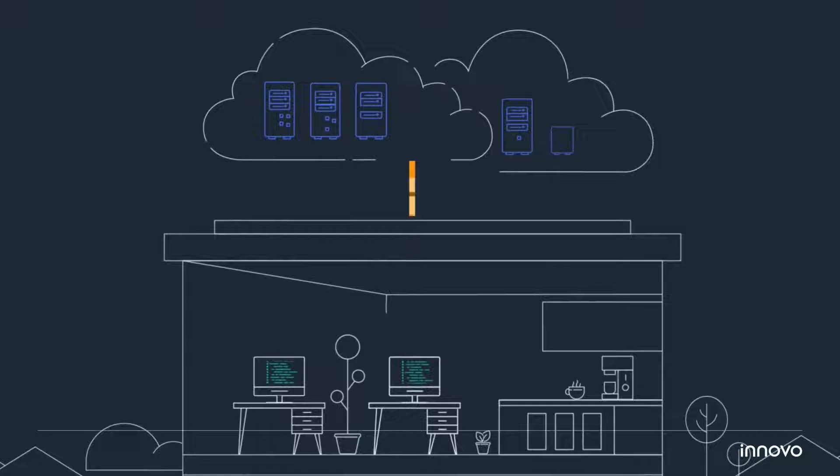So what is cloud computing? In simple terms, imagine instead of buying a powerful computer to store all your files and run heavy software, you rent space and power from a company that owns massive computers somewhere else. Cloud computing providers have huge data centers with thousands of high-speed computers that can work together from multiple locations to generate as much computing power as needed, which allows specialized software companies to provide powerful services over the cloud.

So what are the benefits of the democratization of highly specialized software then? One is access to advanced tools without expert training. Non-specialists, like junior designers, students, or small businesses, can use complex software that previously required expert knowledge.

Another is speeding up workflows. Tasks like simulation, 3D modeling, or data analysis become quicker and user-friendly thanks to simplified interfaces or AI-powered features. Also, reduced costs: cloud-based subscription models often replace expensive software licenses, making professional-grade tools more affordable, as well as promoting innovation and creativity. Greater accessibility sparks innovation by empowering creative experimentation and collaboration across disciplines.

And finally, leveling the playing field. Smaller firms and individuals can compete with larger companies by employing the same tools without needing extensive infrastructure.

Over the past 12 months, we have tested several cloud-based design tools that enable us to develop workflows capable of producing proposals in days rather than weeks. A few examples of the AI tools we've tested are Hektar, a cloud-based generative design software developed by Parametric, primarily aimed at urban planning, pre-design, and schematic design.

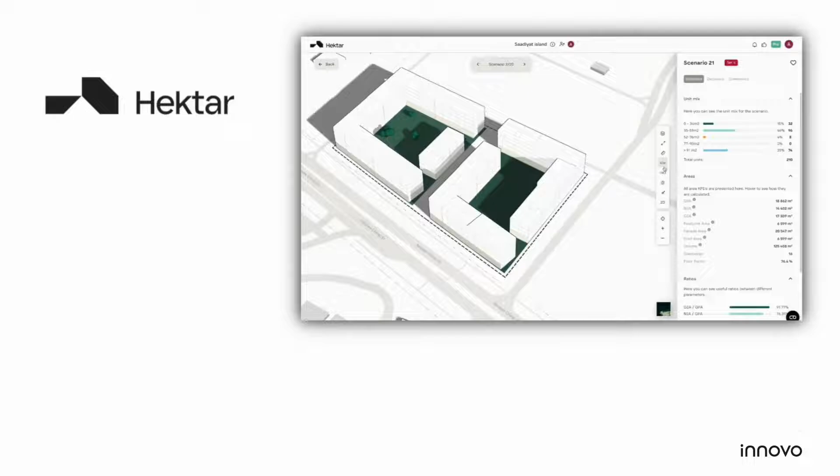TestFit, a real estate feasibility platform designed to streamline the site planning and deal evaluation process.

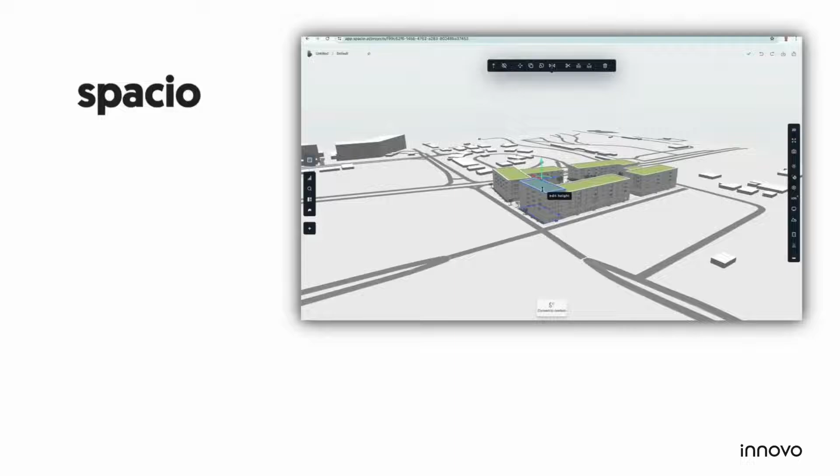Spacio, an AI tool tailored for architects, engineers, and property developers. It simplifies the building design process by combining intuitive tools for instant 3D modeling and real-time analysis, including site data integration, structured BIM-ready models, and real-time metrics for areas, efficiency, and sustainability.

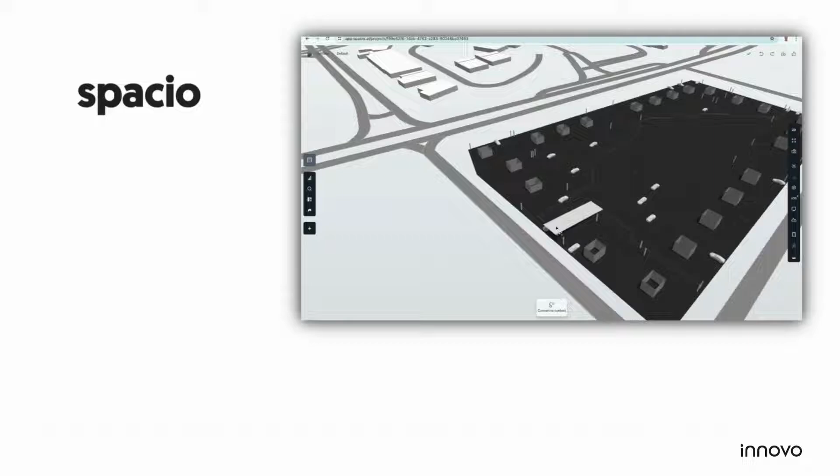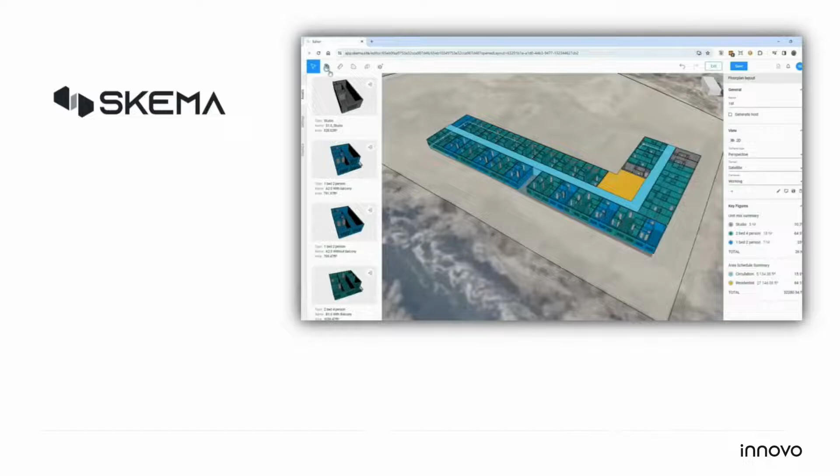SKEMA, an AI-powered platform designed to optimize the building information modeling process. It accelerates workflows by transforming schematic designs into detailed BIM models within minutes, leveraging artificial intelligence and previous design data.

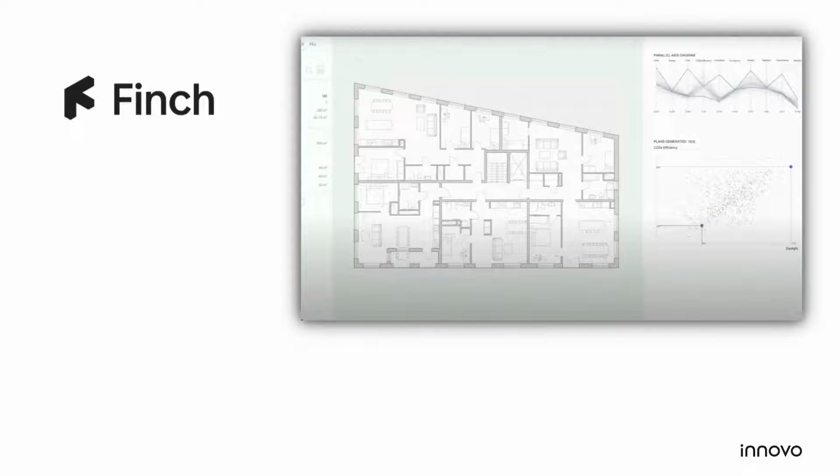Finch, an AI copilot that helps optimize building designs. It enhances the early design process by enabling rapid iterations, offering performance metrics such as space efficiency and sustainability, and ensuring compliance with rules and regulations.

PromeAI, a versatile AI-powered design platform tailored to creatives across various industries, including urban planners, architects, and interior designers. It leverages artificial intelligence to transform sketches and design concepts into highly detailed and realistic renderings.

We will now talk about automation versus manual design. For this, we will use one of the co-design tools previously mentioned, Spacio, to select a site here in the UAE, specifically in the Dubai Design District, to see how the software is able to generate instant 3D models on the specific site.

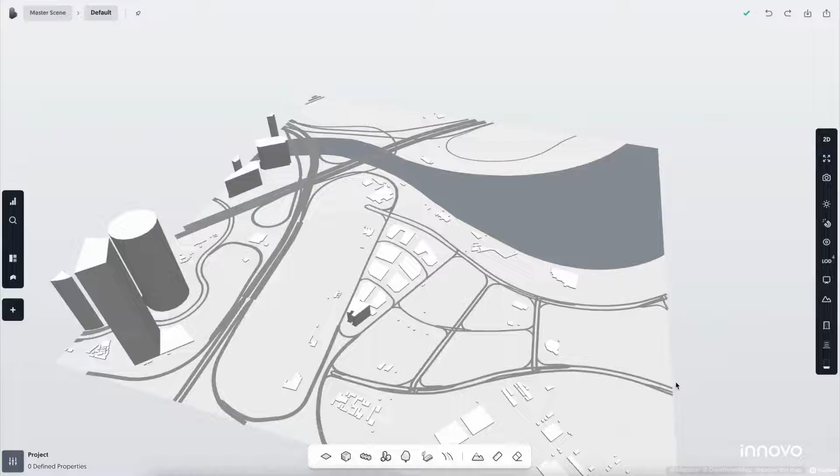It should be noted that many of the co-design software mentioned are mainly tailored for Europe or the United States.

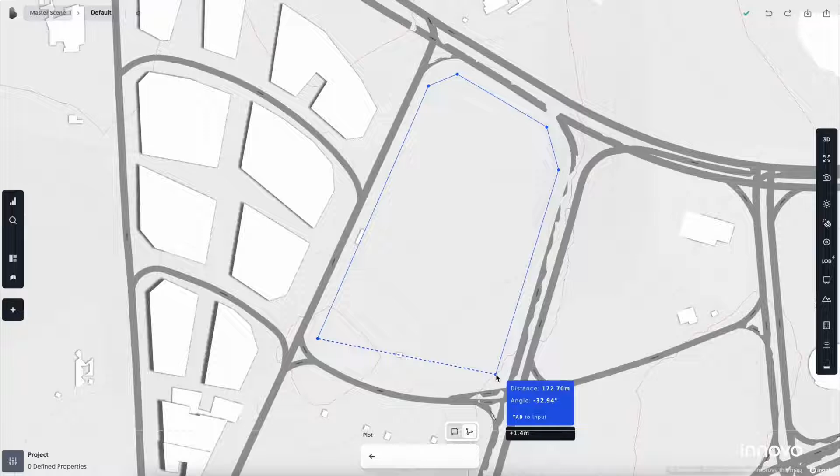Nevertheless, once the site in question is selected, Spacio is able to generate options for residential buildings right out of the gate. Many parameters like building width, height, and number of floors can be adjusted as desired and automatically reflected on the model. Many iterations can be generated by adjusting specific variables like building density, site use, and openness, which will be automatically reflected on the model.

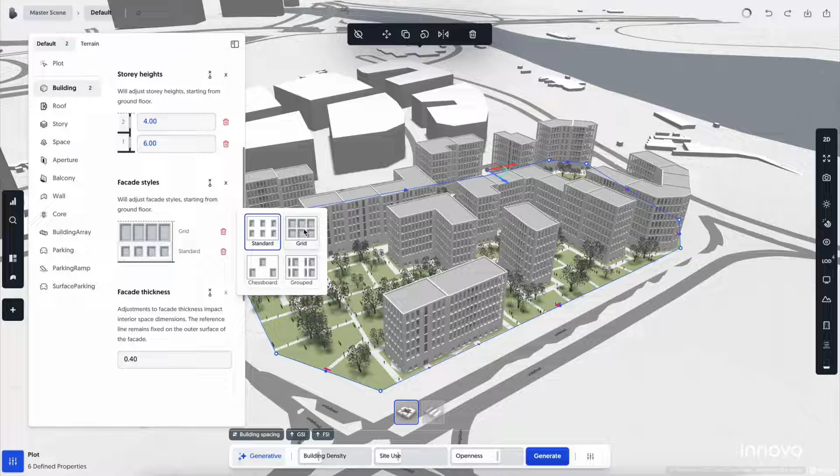Also, different story heights can be created depending on the uses. Alternative facade options can be applied to different floors as suited and automatically reflected on the model.

But as I mentioned, the automatic design generation tools for this software are tailored for mid-rise residential buildings in Europe, perhaps not the base case for a site in Dubai. So what happens if we use the software as a real co-creation tool?

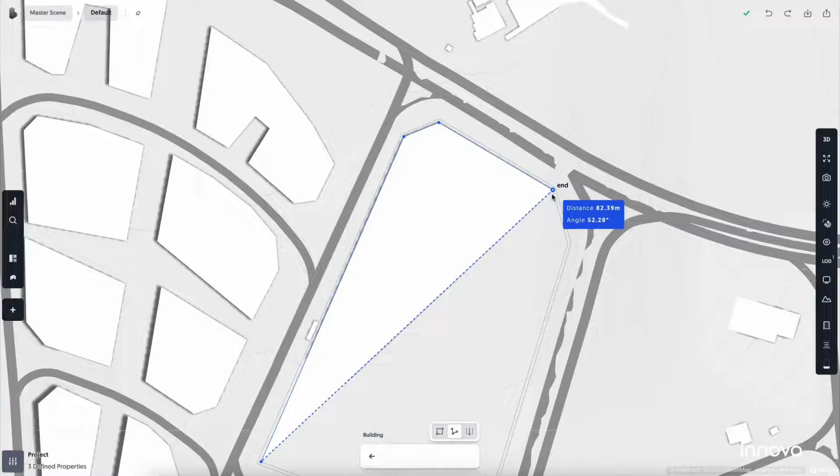The modeling tools of Spacio, or any other software for that matter, can also be used to manually generate the design, perhaps with some inevitable preconceived ideas from the human designer.

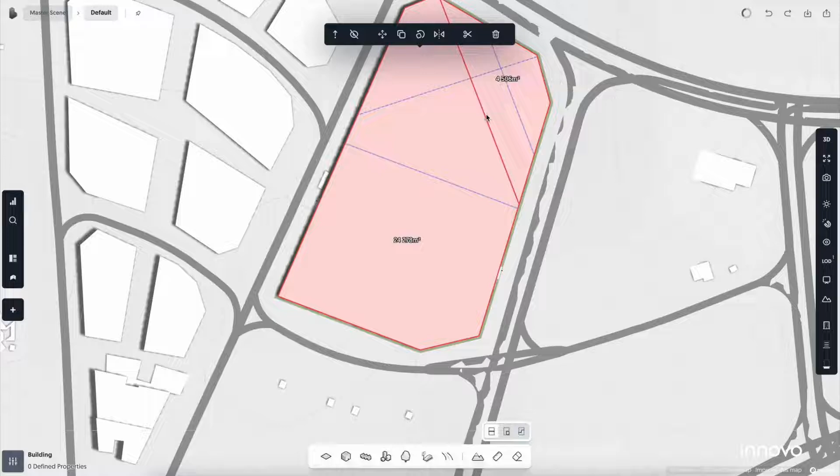In this case, we created the overall site volume and proceeded to carve it, slicing the site with directional tension guidelines that help us create different volumes, by pulling and pushing different cake pieces, so to speak, to try to create a desirable massing.

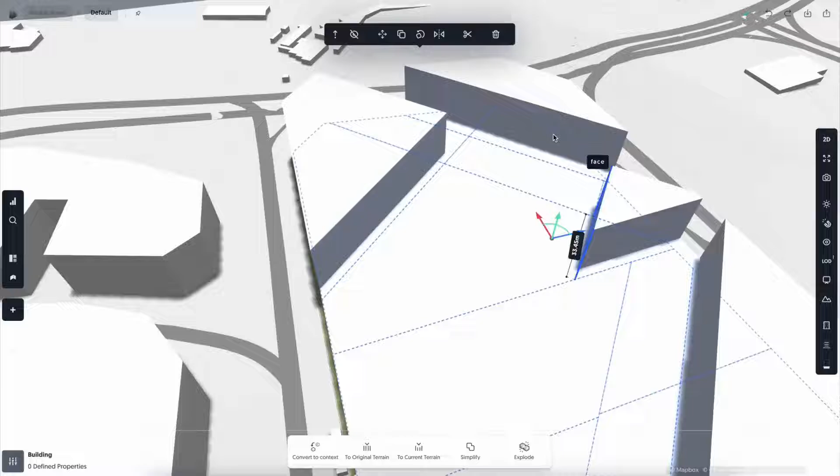This process can be as quick or as long as needed, depending on the results that are automatically reflected on the model. We then proceeded to carve an internal courtyard that will be the main feature of the design, articulating the different volumes and giving a sense of scale.

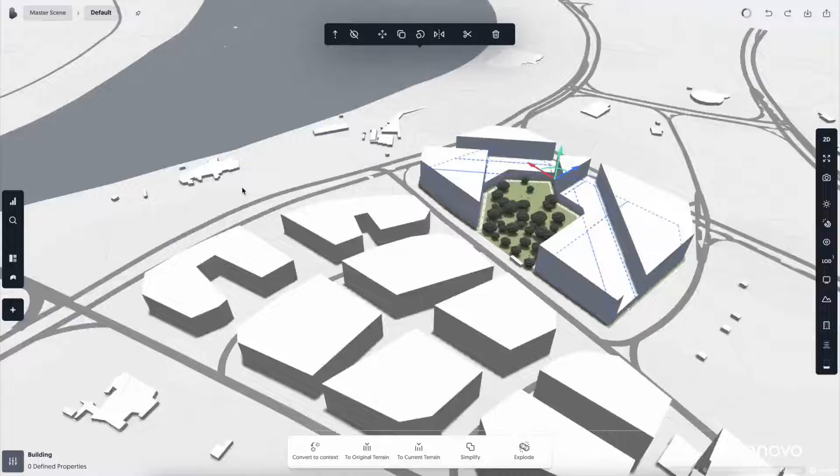As you can see, the process is very interactive and gives the designer the chance to use simple tools to generate quick design ideas that are visually appealing and highly appreciated.

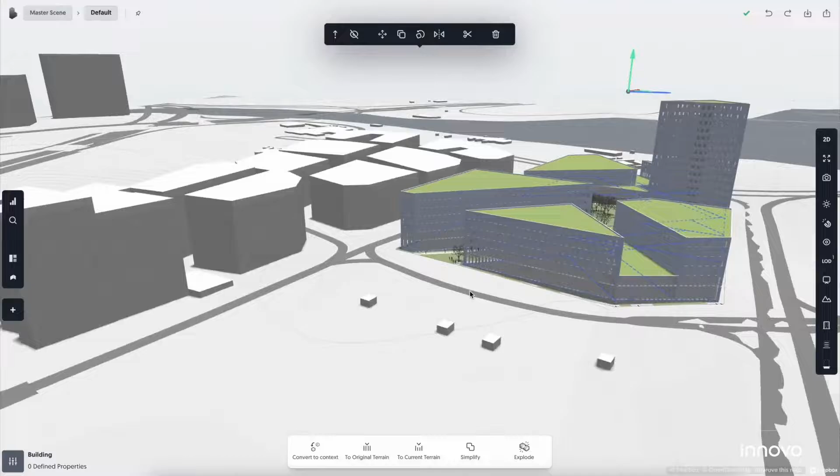This is just a quick example of how cloud-based design co-creation tools can be used to generate high-level volumetric master planning and architectural ideas that are modeled to scale within a given context and easily adjusted, all without the need of complex software and with tangible results within minutes.

So what would happen if we tested a combined approach, partially automated and partially manual, within a compact, more sustainable design context? In this case, a smaller site in the Dubai Creek area.

We select a plot within the given zone and allow the co-creation tool to algorithmically generate design options based on the required parameters. Once the desired massing is achieved, we can then switch to a more manual process to tailor the buildings according to what the designer believes is more suitable.

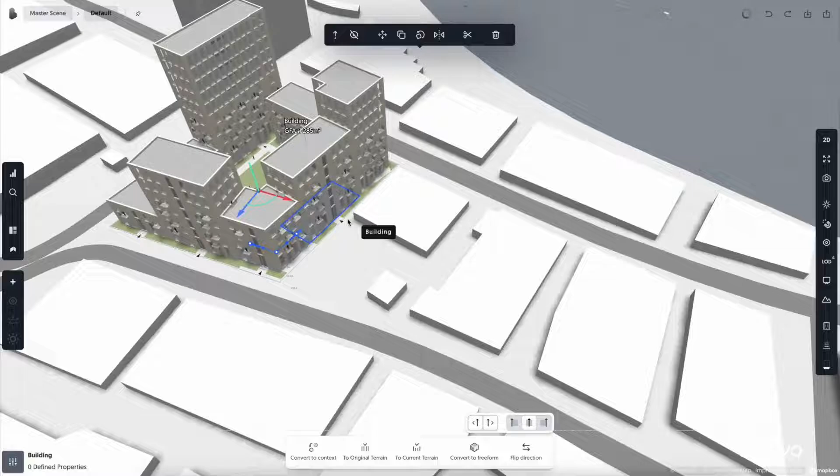Let's agree that this can sometimes be a subjective approach, but that's exactly what the human touch brings, a unique design.

Now, to utilize co-creation tools in a correct, effective, and advantageous manner, we can make use of the power of cloud-based software to run environmental simulations that allow us to make informed design decisions from the very beginning.

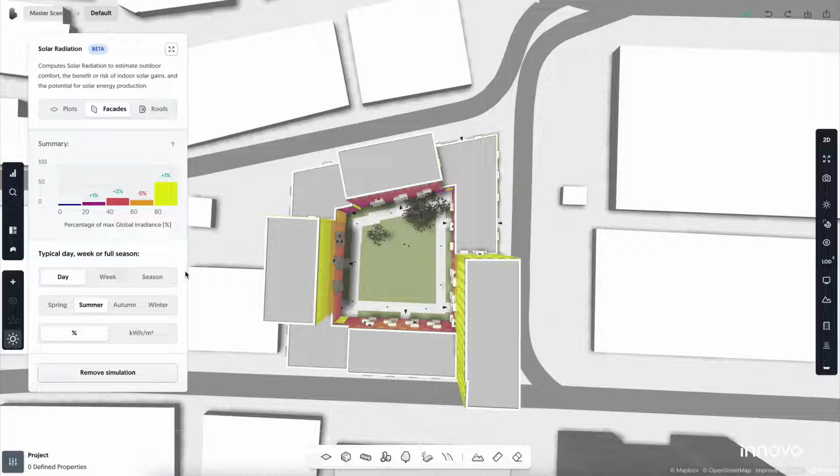Simulations like daylight potential, prominent views, sun hours, and solar radiation provide valuable real-time information that can inform design decisions to create a better and more environmentally sustainable design.

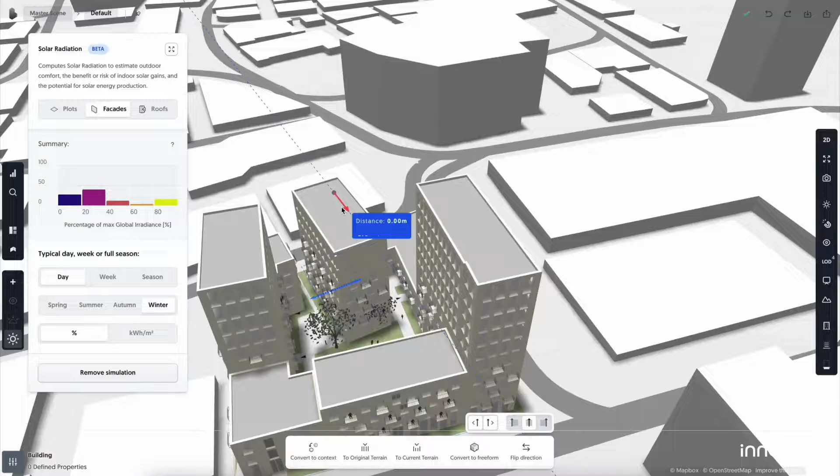For instance, solar radiation on the facades can help us modify the volumes and select different materials tailored for the required exposure, minimizing full south-facing facades and making proper allowance for the eastern and western elevations, while at the same time making sure that the predominant views are maintained.

Sustainable designing. You might wonder, what do I mean when I say sustainable designing? I believe that, for the time being at least, we have the opportunity to decide in which tasks we want the AI-driven software to help us during the design process.

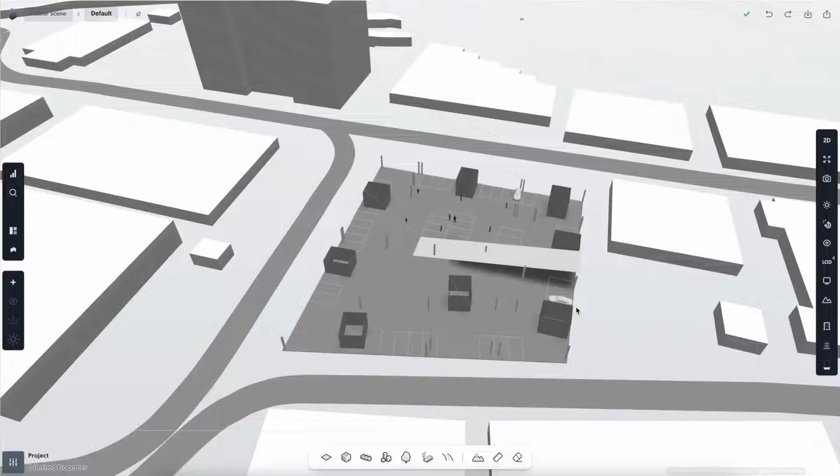Tasks like parking calculation can be fully automated by these co-creation tools and adjusted in real time during the early design stages. Similarly, all area calculations like gross floor area, net internal areas, and others can be accessed at every stage of the design and automatically updated while making any design modification.

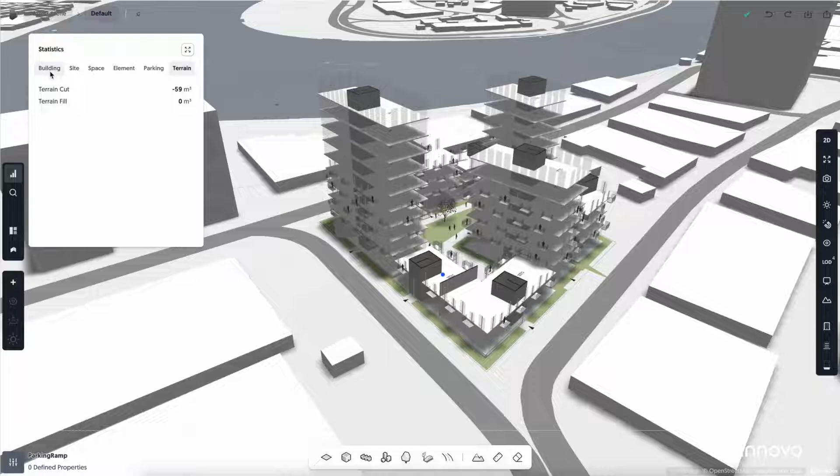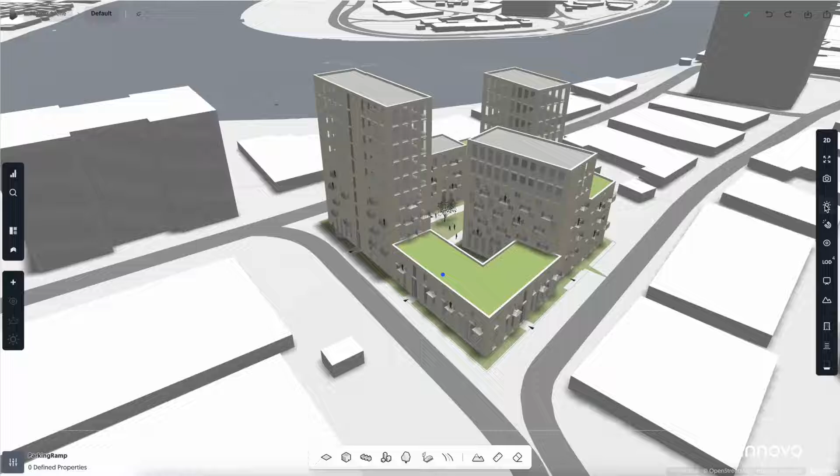Moreover, the generative design AI-driven software can automatically calculate number of vertical cores, propose units mix and others on the basis of the different clients' and authorities' requirements. There is still a lot of room for improvement in these co-creation tools. But consider that, like with any other AI platform that we interact with today, they are going to rapidly improve and be an integral part of our design process.

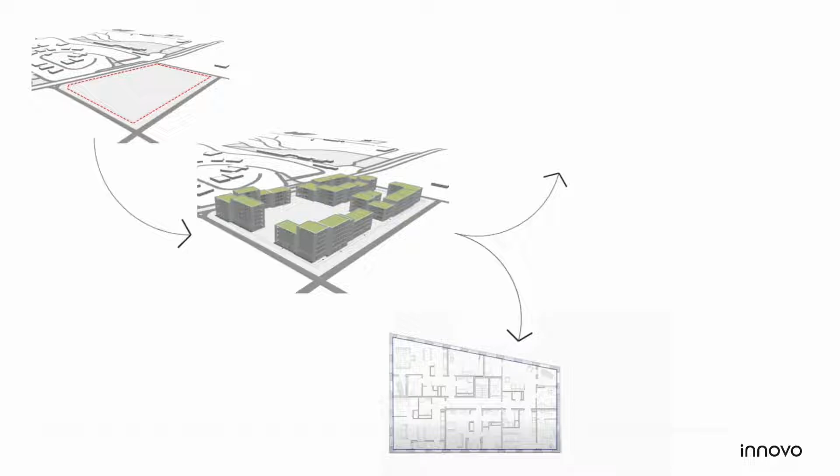A typical workflow using a combination of co-creation tools is as follows. Once a site has been selected and a number of volumetric scenarios have been explored to quickly identify the potential of the site, we would then be in position to interact with other AI tools to run internal configuration algorithms to find the best suitable layout for the given volumes.

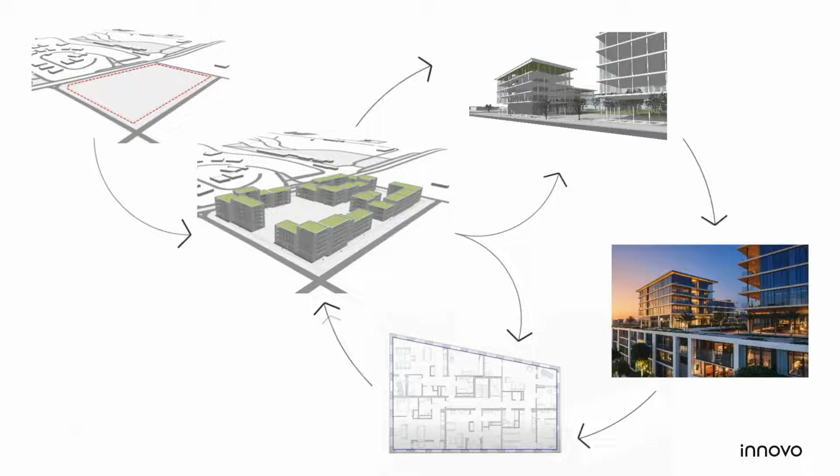At the same time, we would also export a number of views and run them through AI tools to generate related mood images tailored to the specific volumes. This workflow could be run multiple times until a desirable solution has been reached within hours instead of days.

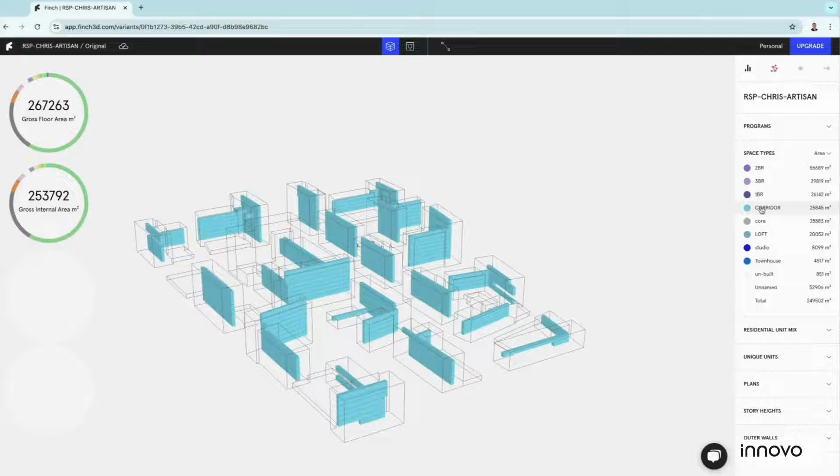As an example, we have deployed AI copilots as a validation tool to analyze the master plan and obtain additional data that was necessary to understand the full potential of the project. Some of the additional data gathered were the gross internal area, the percentage between the net internal and the gross floor area, the residential unit mix, etc.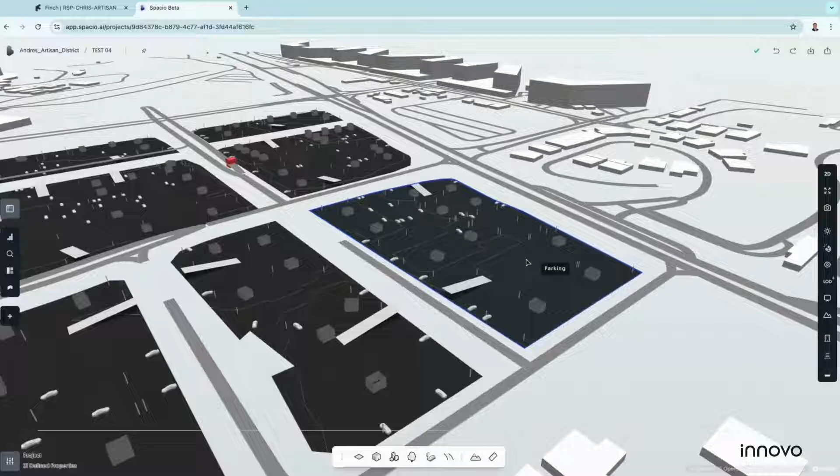Moreover, we used AI tools to test the built-up area of the basements and the potential parking allocation within the basement, considering the position of the ramps and location of vertical cores. Further volumetric studies can be carried out to understand the relationship between the buildings and to extract views to transform them into highly detailed and realistic renderings to illustrate the early facade design intent that would help to visualize the potential of the development.

This is all nice and well, but I am here at the Green Building Council giving a talk about AI and cloud computing. And some of you might be wondering, what are the CO2 emissions that are being generated by all of this? AI and cloud computing are estimated to account for approximately 2.5% to 3.7% of global greenhouse gas emissions. In comparison, the aviation industry is responsible for approximately 2.4% of global emissions.

But if we put this into a broader context, the livestock sector accounts for approximately 14.5% of global greenhouse gas emissions. And this is a conservative estimate, not including the emissions generated by agricultural practices involved in cultivating and transporting the crops used to feed livestock, among other factors.

So how much CO2 does ChatGPT generate? You might have seen in the news recently and in social media that apparently saying please and thank you to ChatGPT costs millions of dollars. Basically, OpenAI CEO Sam Altman responded to a user on X who was curious about how much money OpenAI has lost in electricity costs from people showing good manners to their AI models.

Well, a single ChatGPT query uses 2.9 watt-hours, which is 10 times more than a single Google search. The monthly carbon footprint has been estimated to be equivalent to that of 260 transatlantic flights. Definitely, new technologies put more pressure on the use of natural resources and CO2 emissions, and we all should be mindful of this. So, the question that I will put forward to you is, shall we be polite to a robot or not, in order to save OpenAI some dollars by reducing electricity consumption?